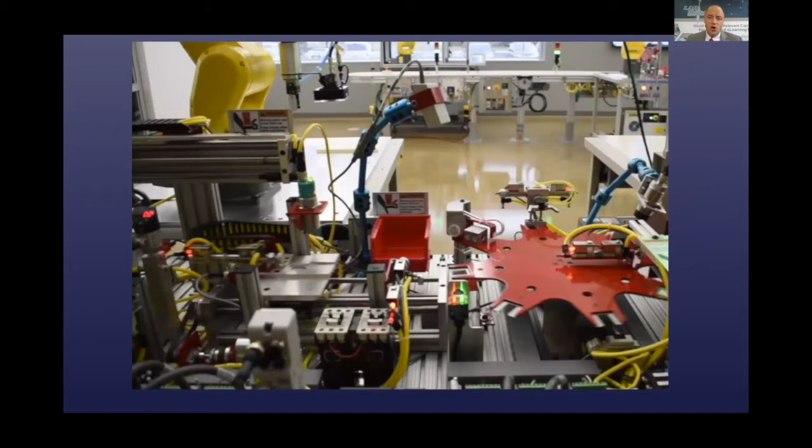We are going to start by talking about mechatronics and then about entrepreneurship. As many of you know, we work with mechatronics programs all over the Midwest, implementing really cool cutting edge technology. Smart devices and smart sensors are a key part of that technology, and when we talk about smart sensors and smart devices, one of my favorite types is radio frequency identification.

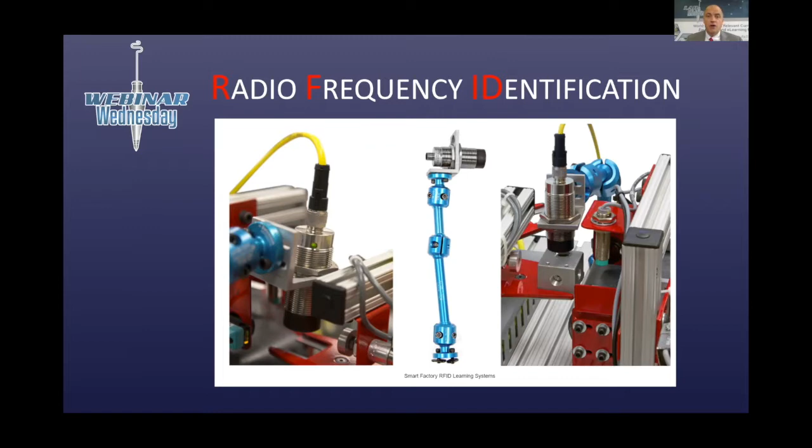This isn't a coincidence. I actually started my career in manufacturing in the world of RFID. If any of you have had a loved one in an Alzheimer's care center or assisted living center who was prone to wandering, they put a little RFID tag on your loved one to prevent them from wandering out of a door or onto an elevator. If you've been involved with a birthing center, where they put an RFID tag on the baby to prevent abduction from the hospital, that was our product. We pioneered that market nearly a quarter century ago.

It was absolutely fascinating to be part of a fast growth, high-tech company early in my career. Some folks even called us entrepreneurs. I don't know that we were entrepreneurs necessarily.

When I was in business school, I was actually approached by the dean of the college and invited to enroll in a course on entrepreneurship, and I didn't do it. Part of the reason was I wasn't even sure entrepreneurship was something you could learn, as opposed to being personality traits and things that were just innate in individuals.

But when we think about entrepreneurship, I think there are four things that make somebody entrepreneurial. Number one, an entrepreneur listens. When we were developing products for the healthcare industry, we did not start by going to our engineering team and saying, what do you think the market would like? Where did we start? Of course, we started by going to our customers.

We went to the market and said, what would make your life better? What could we innovate that would improve your ability to do your job? So we start with listening, listening to the market and listening to what it is telling us.

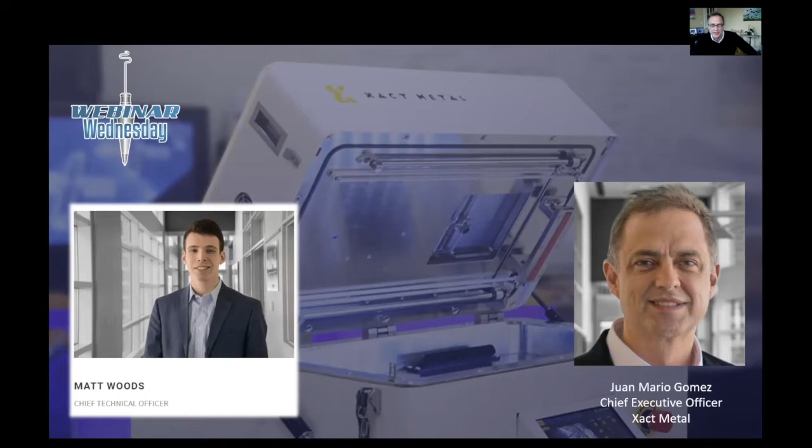It's the area that is one of the key areas in the manufacturing world today. It's one of the key areas where engineers need to be trained in the future. And if the market is there and if we can bring lower cost printers to the marketplace, which is what is really restricting the market from being successful and well adopted, maybe we have something here. So that's how we met. We embarked on a journey together about 3+ years, almost 4 years ago. And it's been a very fun ride.

And I know from visiting, it's just an incredible culture of entrepreneurialism at Xact Metal there in State College. And I got that sense both from you and from Matt. Tell us about what you love about leading an emerging entrepreneurial company.

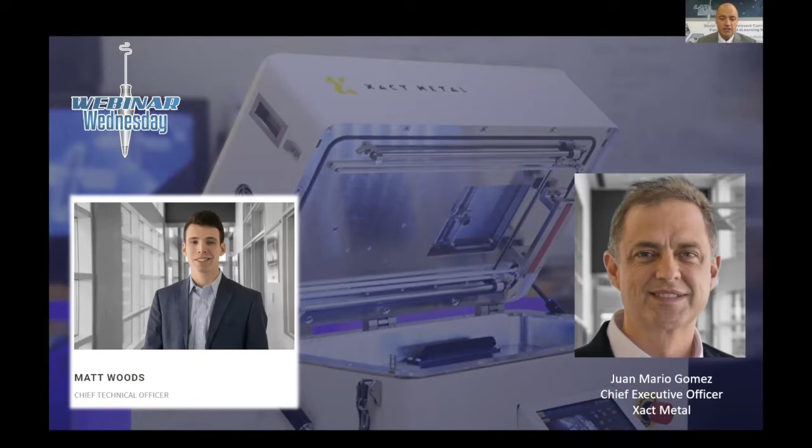It's just great. I mean, the idea that we're in State College, Pennsylvania, it's fun. It's a small university town, but it's also next to Penn State, so there's lots of talent and capabilities near us. But more importantly, just like the 3D printing business is, also our companies like that. You have people like Dave and myself that have scars to experience in life and have done many crazy things. But there's also young people like Matt that you see in the picture here, who are just fearless. They have great ideas, great motivation. They really love the technology and what they're doing. And they just need some guidance and direction, and then they're changing the world.

That type of culture we want to keep here within Xact Metal is one that we're young and energetic, but we also are behind our customers, behind what we're doing. We deliver a good product that's ready to go from the beginning, that we support it well. And that kind of dichotomy is what makes us strong, I think, and it's fun. For me, it's really enjoyable to come to the office and now online and see people and the type of ideas that we bring together.

And that spirit of innovation is alive and well, being so close to an iconic college campus. Having visited, you toured me through not just your facility, but we spent some time on campus, some time in Innovation Park. There's a different spirit in that part of the world. What can you tell us about how being located in Innovation Park affects the culture of Xact Metal?

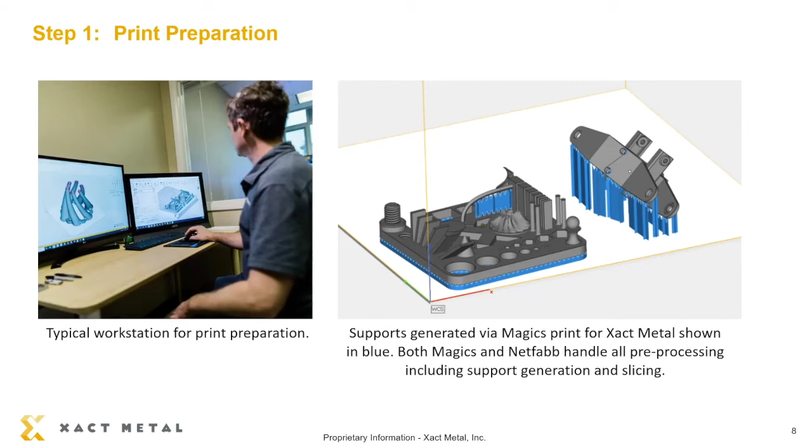Before I hand it off to Stevie, let me quickly walk through with a series of slides what you're going to be seeing. The first step is preparation of the build file, essentially taking a supplied CAD file and running it through software to optimize the position and orientation of the part on the build plate.

The second step is loading powder into the printer. The printer operates using a high-powered laser to outline the shape of the part. It fuses the powder, and when the powder solidifies, it assumes the final shape of the component.

As you can see, Stevie is wearing personal protective gear that is required when the lid of the printer is open and you're adding powder. Once the lid is closed, the PPE is no longer required until you reopen it to remove the part.

During the virtual demonstration, to make it easy to understand, we will not actually be using real live powder, so Stevie will not be using the PPE.

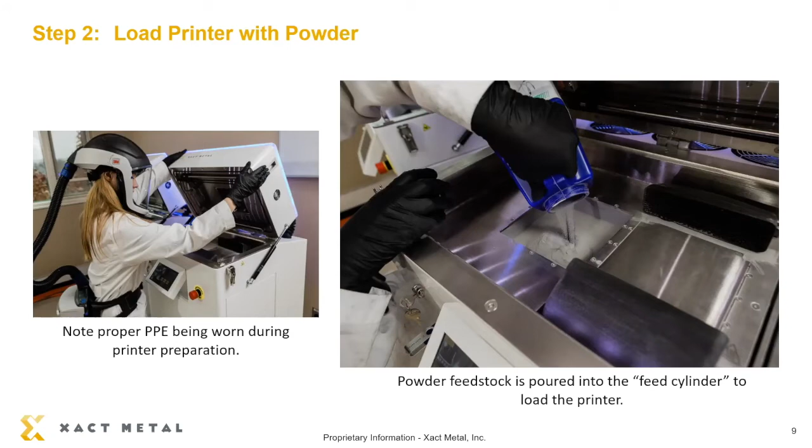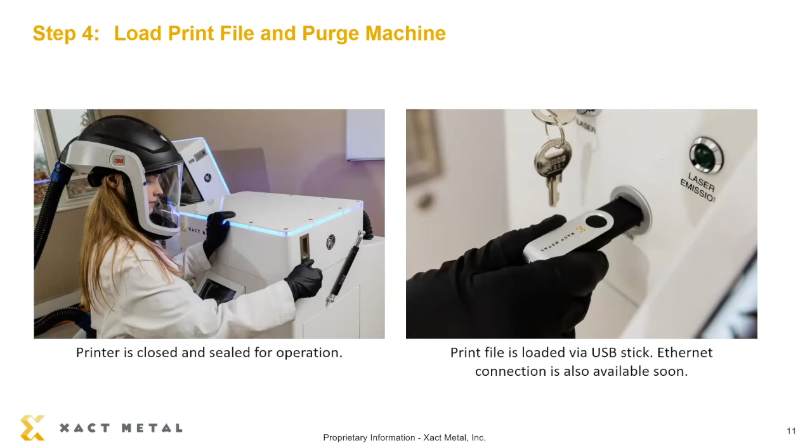After loading the printer with powder, there are a couple other steps to prepare it for printing. We close the lid and purge the machine with an inert gas such as nitrogen or argon. Stevie uploads the build file via USB or through an Ethernet connection. We level the build plate, and then the print is actually conducted.

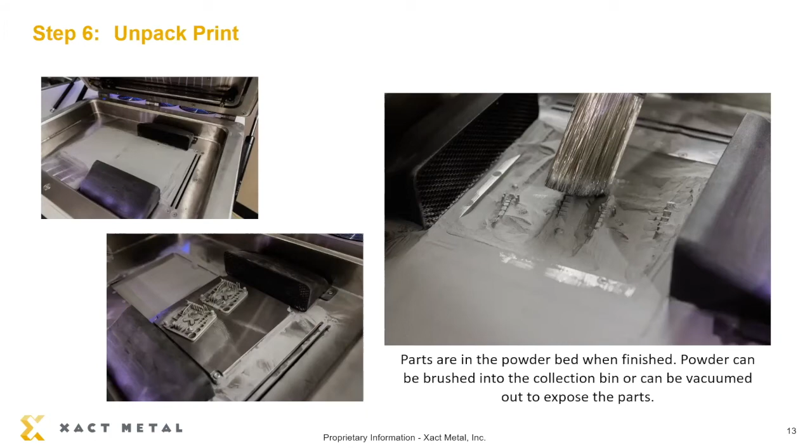After the print is done, we unpack it. On the bottom left you can see the parts, and on the right the powder is being removed. After the build plate is removed, we have to cut off the part from the build plate.

Metal powder bed fusion printing is a micro welding process, so the part is actually welded to the build plate. You can use an EDM, a precision bandsaw, or even a flush cutting tool to remove the part.

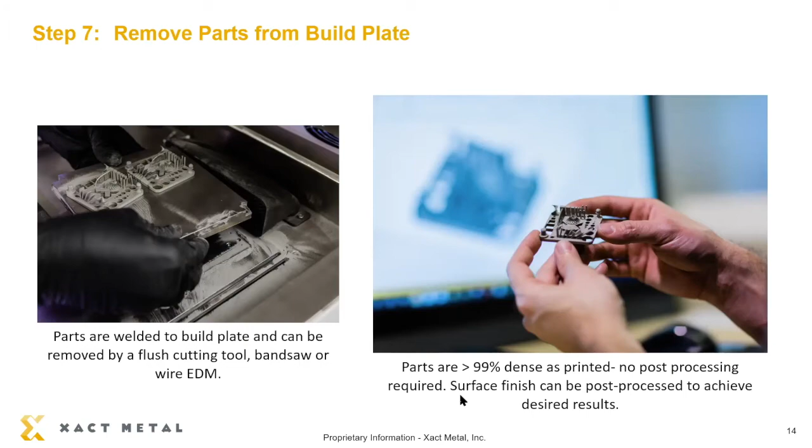So at this point, I'm going to turn it over to Stevie. As I mentioned, Stevie's been with us for about two years. She is very passionate about 3D printing, so I'm going to turn it over to her.

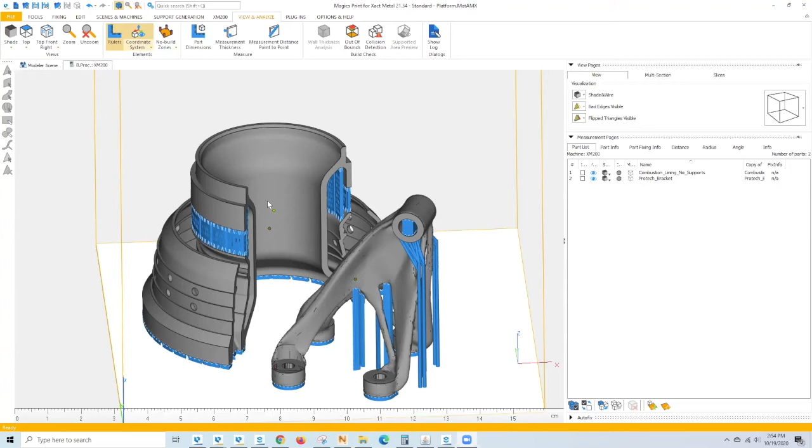Let me go ahead and share my screen. Like Dave said, the first step in creating a print for the XM200C is loading a file into our software. We have partnerships with both Materialise Magics and Autodesk Netfabb. Here I have Magics open.

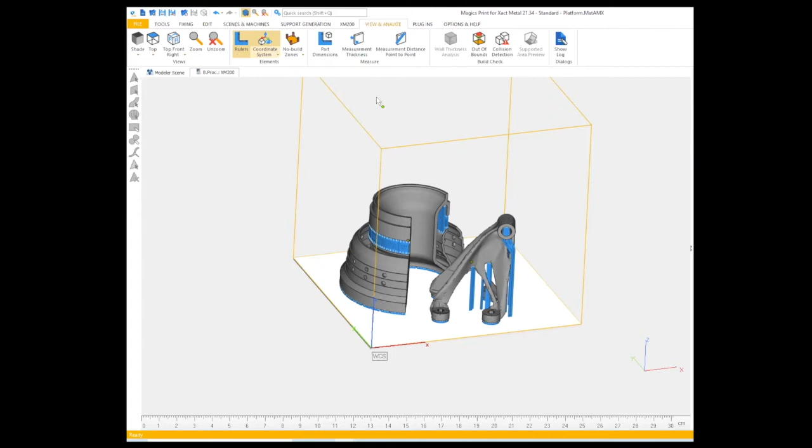We have a scene created for our printer, illustrated up here, the XM200. When you have a scene, it opens up a build area that is representational of our build chamber in the printer. Here we're able to import STL files using the import part command. This blue mass is a support material that is applied to the part as well.

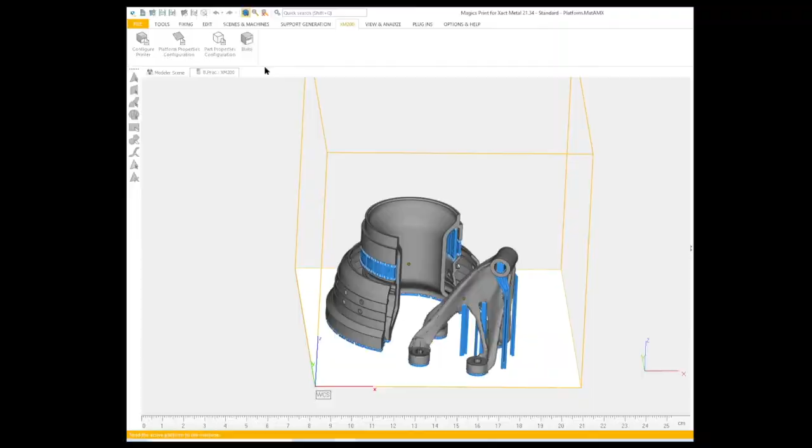When your parts are all done getting set up, we can export the part. Up here on the XM200 tab, we can select build, rename the file, and submit it for a quick export. You can see a notification has popped up that our print is now being sliced.

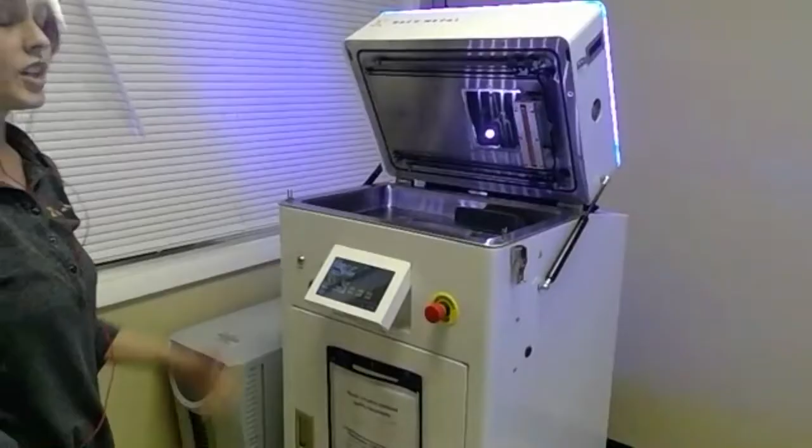This is our XM200C. As you can see right inside, everything is very simple and easy to see. We've got our feed cylinder—this is the chamber where the powder will go—and our build cylinder, which is the chamber where the print will occur.

Between each layer, the feed cylinder will raise and the build cylinder will descend, and our recoater will travel back and forth between the print area to add more powder from the feed cylinder onto the build cylinder.

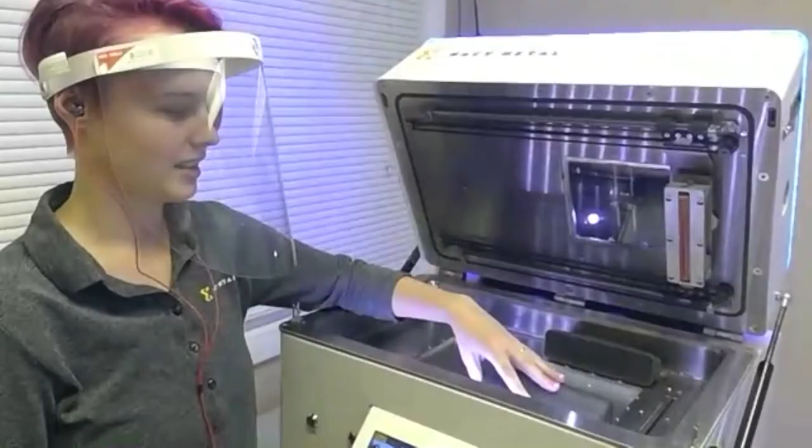We also have two manifolds. This is our high pressure manifold, and this is our low pressure manifold. The high pressure manifold has two bolts that keep it bolted down, and the low pressure manifold lifts out for easy cleaning.

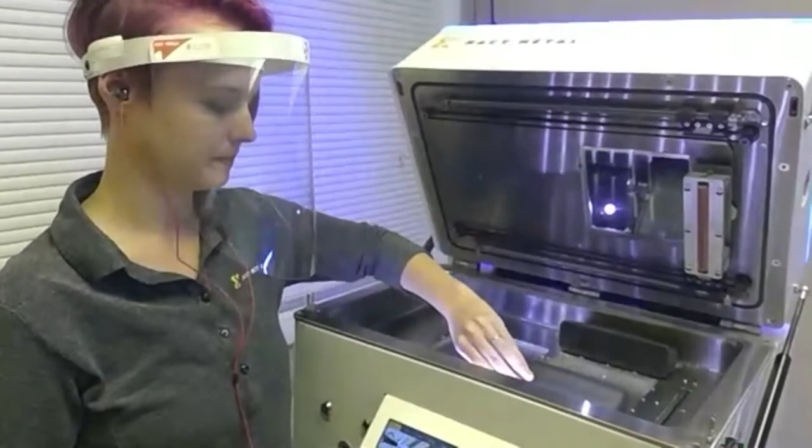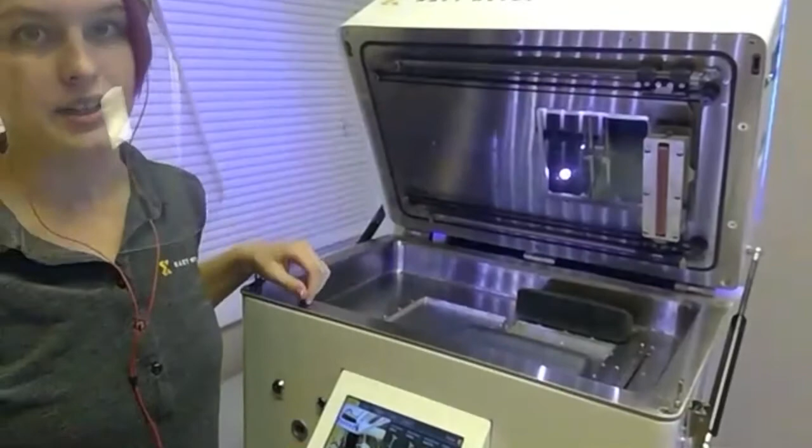Over here is our catch bin. As excess powder is being brought across the build area, it'll fall into a funnel. This will then end up in a catch bin that can all be resieved and returned to the printer for the next print. This is our optical window.

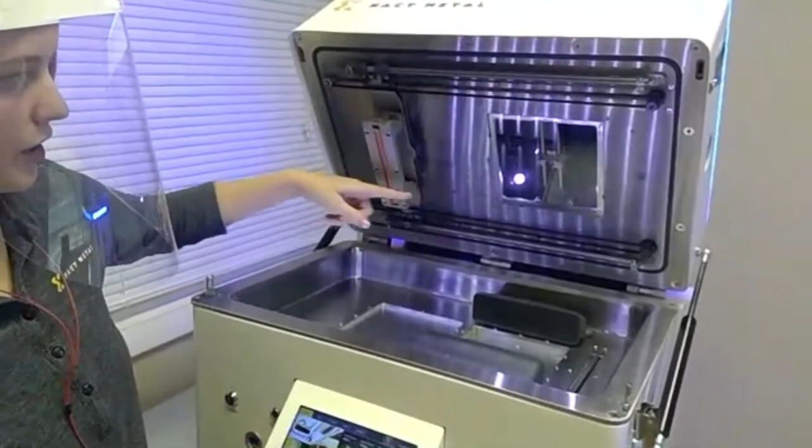As you can see, back here is where the scanner is. The laser comes in and gets reflected off a few sets of mirrors on an X and Y gantry. These move 500 millimeters per second to expose the layer over the print.

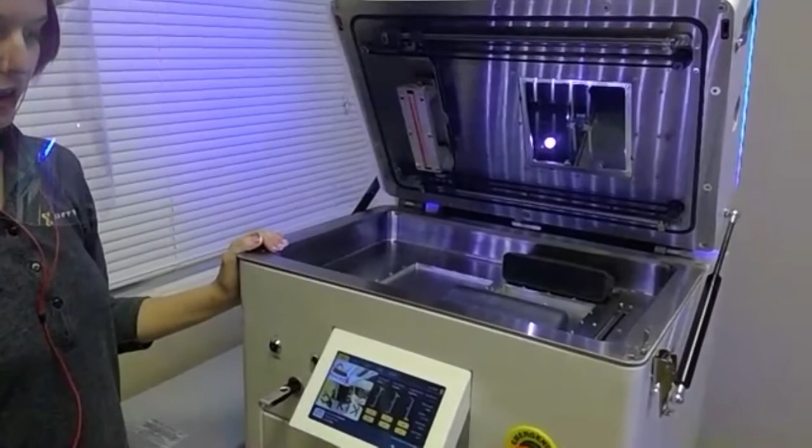Here we have the thumb drive with our print that we exported. To upload it, we simply put the USB inside the printer, and a notification screen will pop up. Using this, we can upload our build—here it is, test parts. You can even upload prints while the printer is already running.

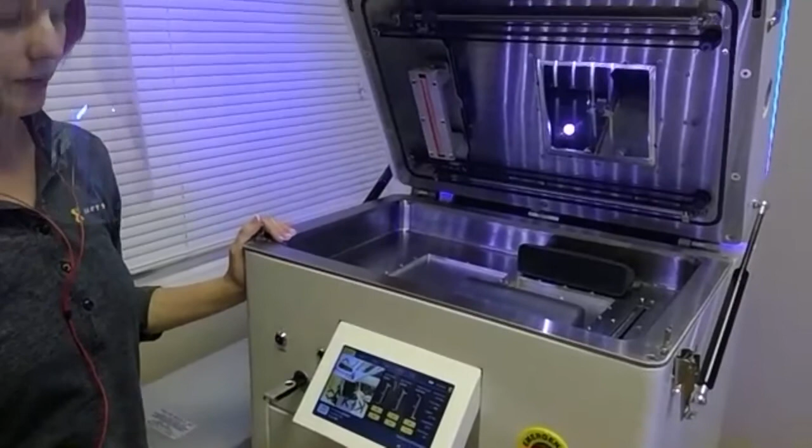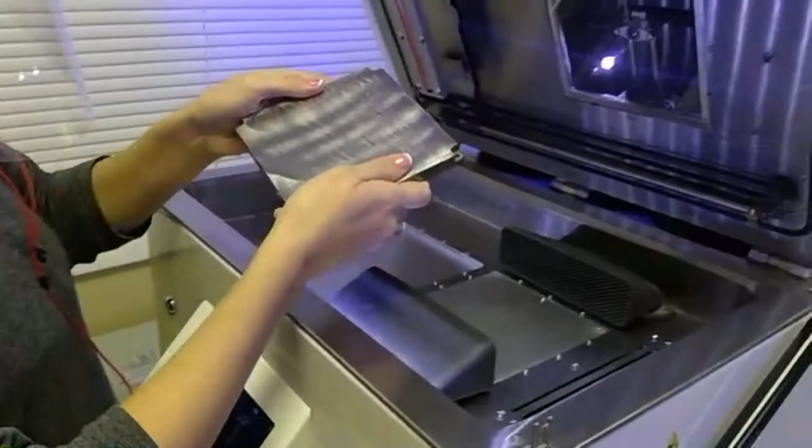For this next portion, to simulate starting a print, we can add a build plate. Let me grab one—here's a build plate. These are made of A2 tool steel, and we reuse them between prints. We simply drop it in and use a 3 millimeter hex key and four screws to bolt it down.

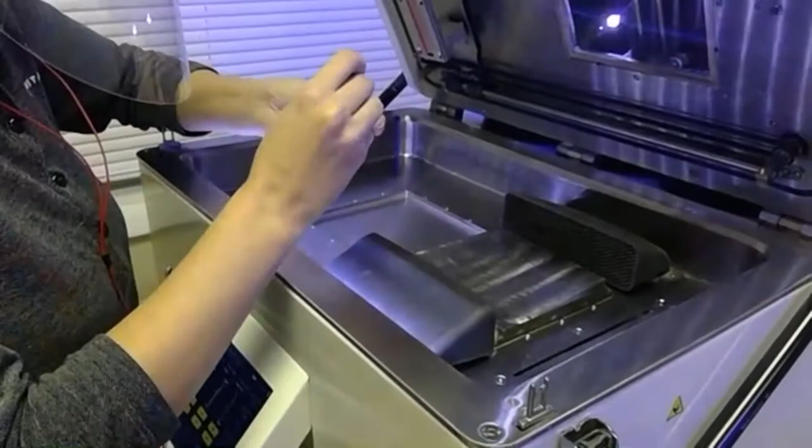Great, so now we have our build plate installed. Before starting a print, we would descend the build plate so that it is flush with the lid of the chamber. This gives the recoater clearance to move and start the print.

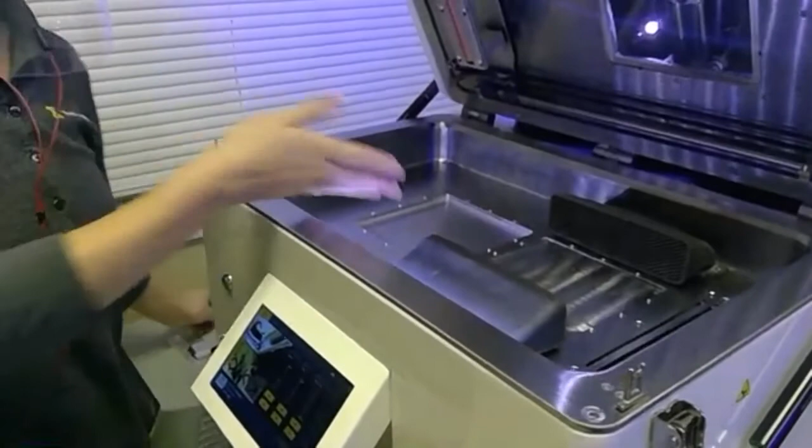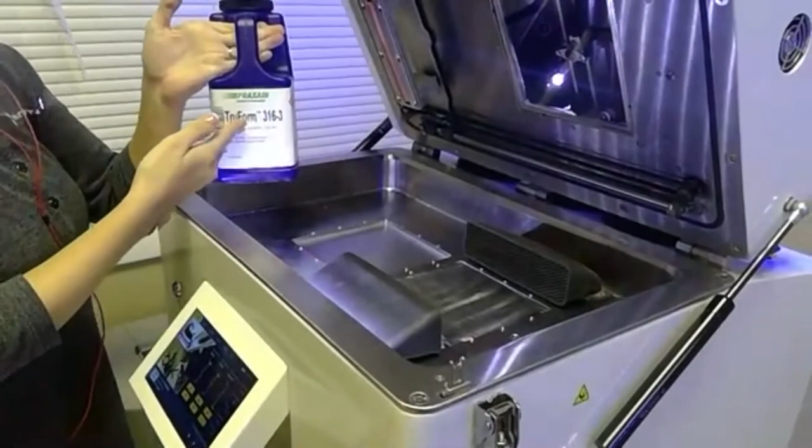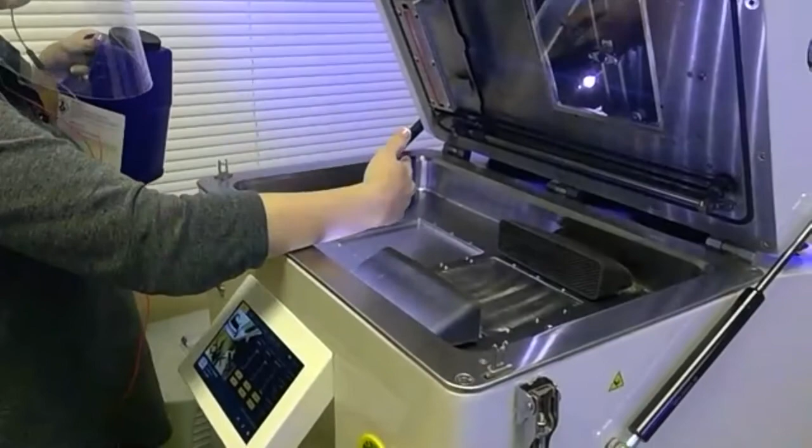Now we can add our powder. Like Dave mentioned, we won't be using live powder, but our powder arrives in these bottles from Praxair. We simply unscrew the top of the lid and pour the powder directly into the printer. After it's loaded, we use a scraper to wedge the powder to expose any dormant oxygen pockets.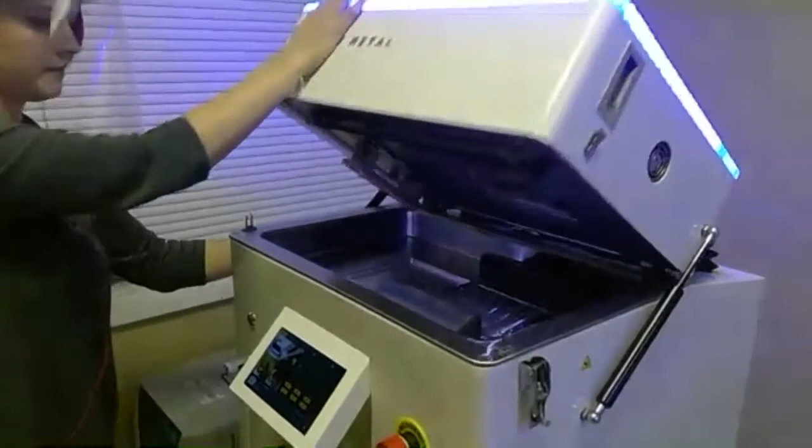To start the printer, all we need to do is close the lid, engage the latches on either side, and then we can begin the auto purge.

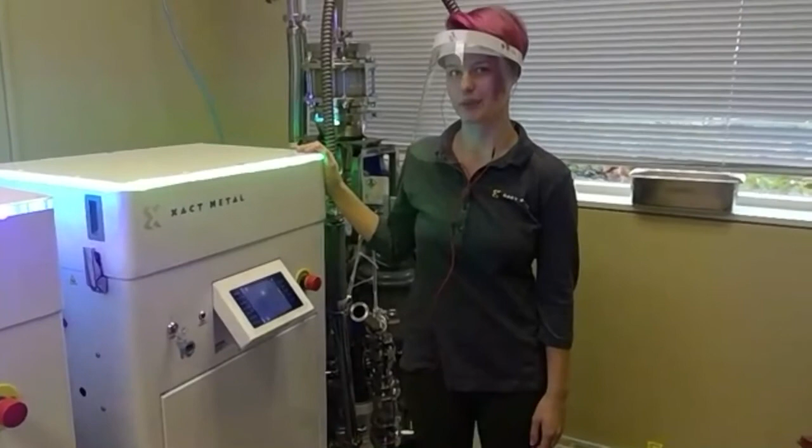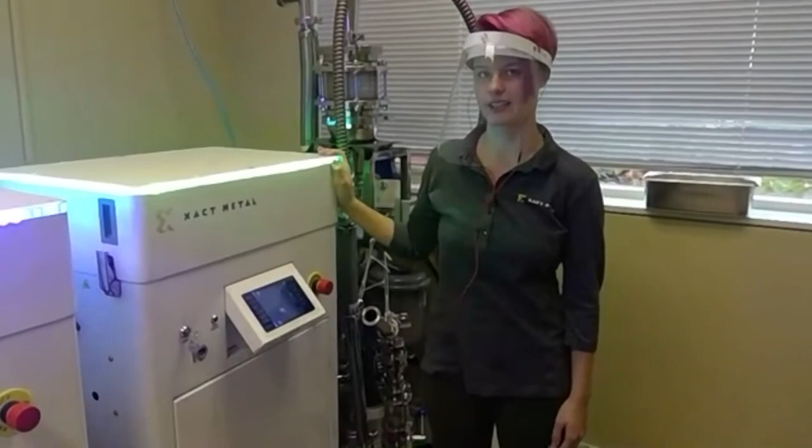As you can see on this printer that's running, we have a green light, because these LEDs are status indicating. The blue light on the previous printer indicated that it was in an idle state, whereas green indicates that the printer is running and in a printing state.

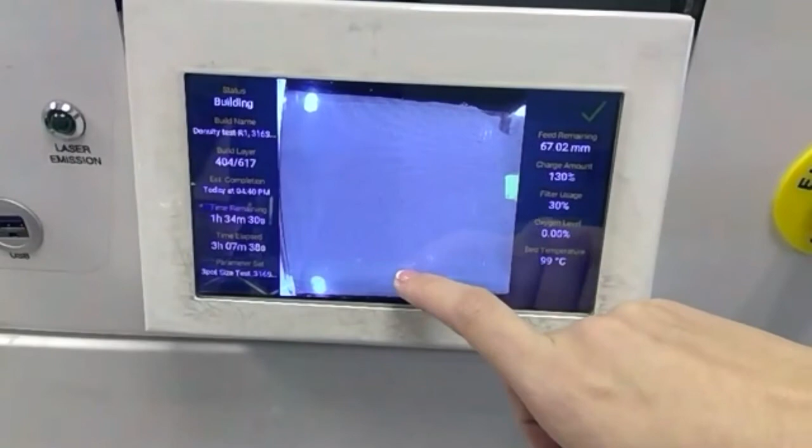Here on the front you can see that the printer is actually printing. The display is enlarged, showing that the laser is emitting over the part and the recoater is bringing across more powder between layers. We also have some information on display here at the top.

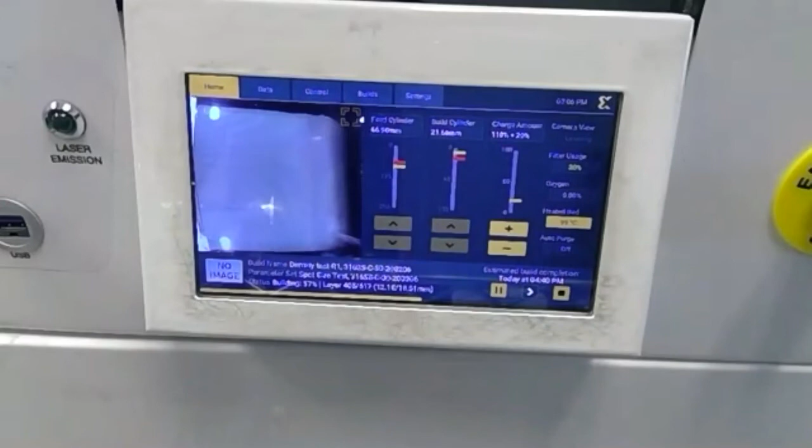Here you can also see that the feed and build cylinder positions are locked during the print, so no one can come in and change the positions during the print. But you can change the charge amount, which is the ratio of powder that's brought across between layers.

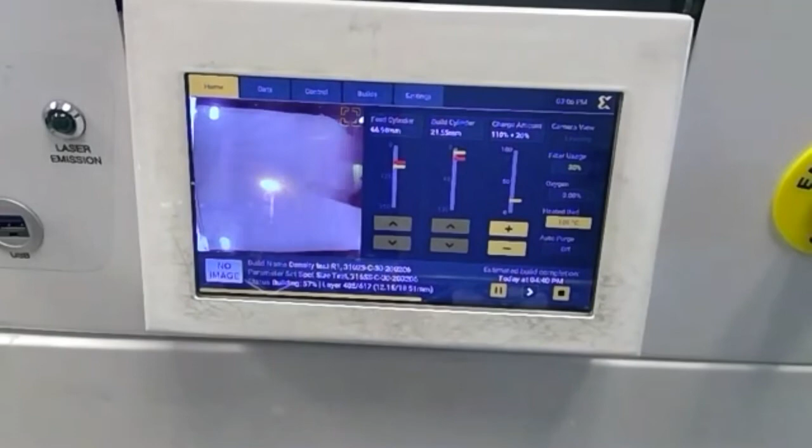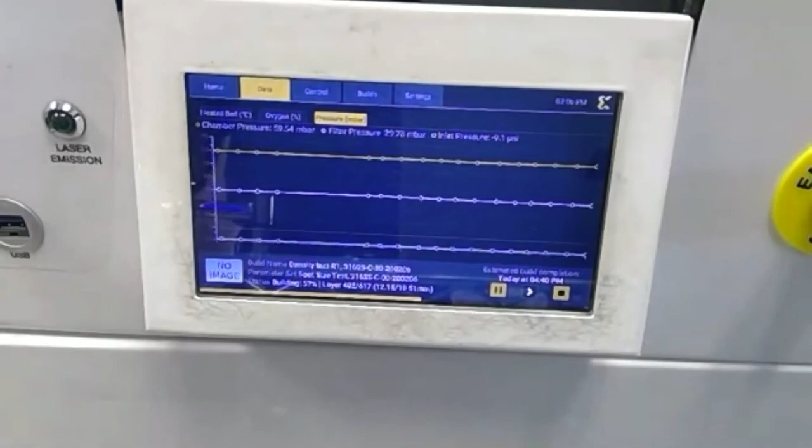Over here we have the data tab. This gives some quick information like the oxygen level and also different pressures inside the printer, which can help to know when the filter needs to be replaced.

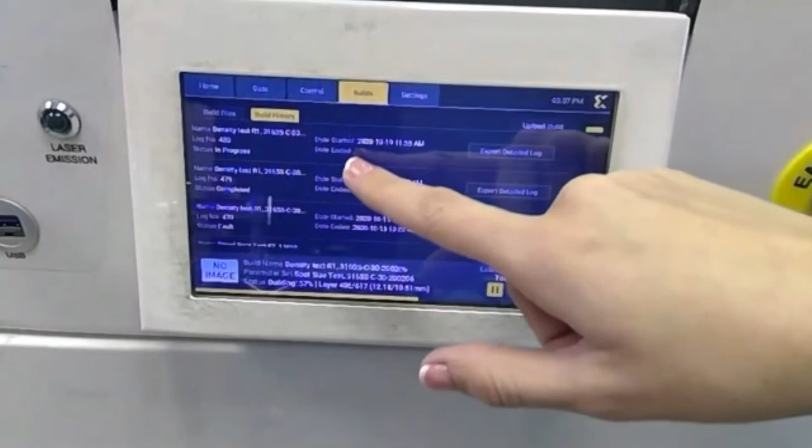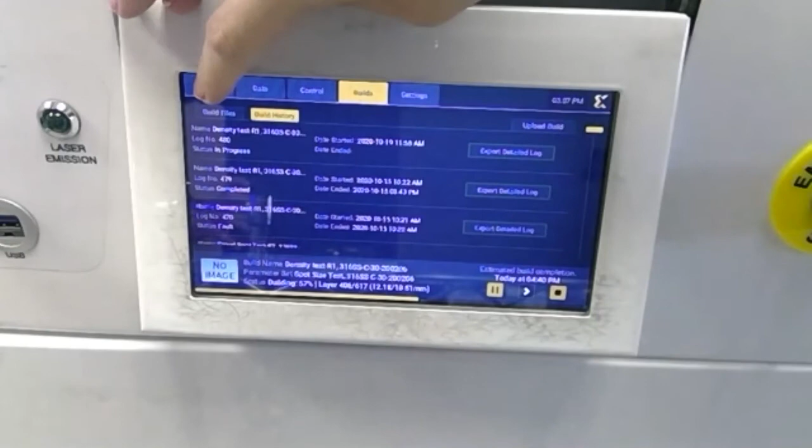One of my favorite features about the printer is the detailed build log. Whenever the printer runs, it actually takes a picture pre and post laser exposure for every layer, and also takes a data sample every second. All of this information is compiled into a zip folder that you can then reference after the print.

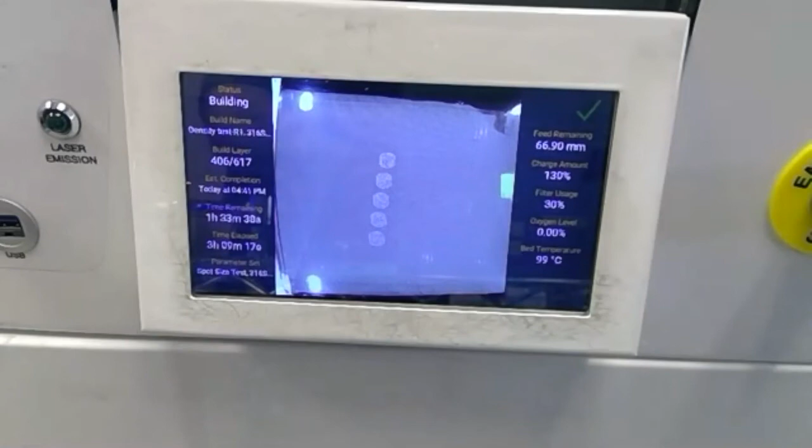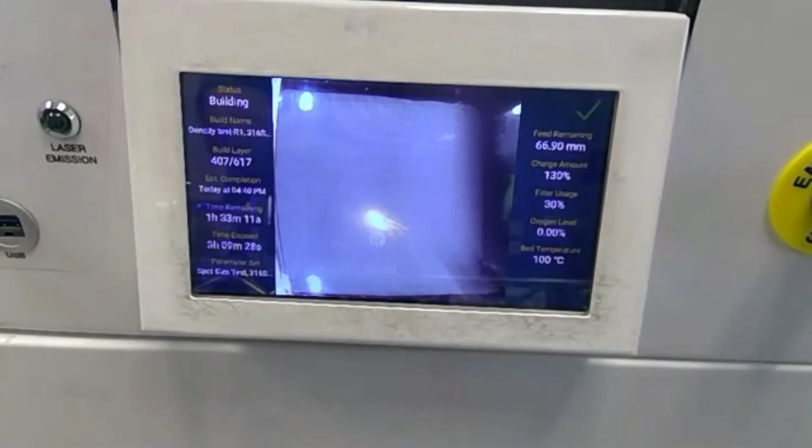So if you come in the morning and the print doesn't look exactly how you thought it would, you can quickly reference the build log and see if something happened during the print, like insufficient supports being used or your argon supply running out. Now we're ready to begin removing a part from the XM200C.

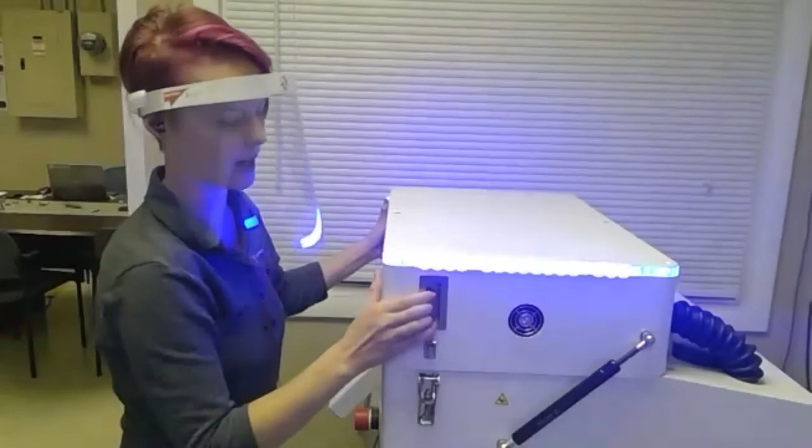First, we'll begin by undoing the latches and lifting the lid of the printer. Typically, we would see powder across the feed and build cylinder.

Our first step would be to take all of the powder in the build cylinder and move it into the catch bin. You can do that by using a brush to manually move it across, or by using a vacuum and cyclone separator to vacuum out all of the powder and put that through a sieve.

All of the powder in the catch bin and build cylinder can be re-sieved and returned to the printer to be reused in the next print. Once all the powder is removed, we can then eject our build and remove it from the printer.

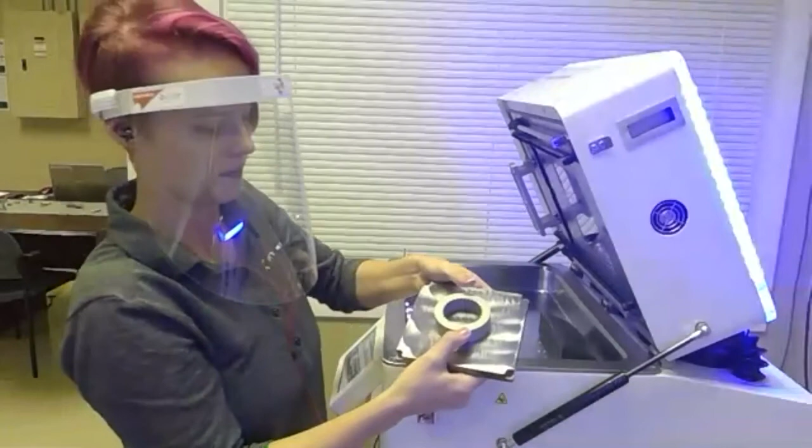So here we have our print. Once the part is removed from the build plate, additional post-processing steps can include removing support material from the part, bead blasting, or even heat treatment.

So with that, that concludes our XM200C virtual demo. We want to give a big thank you to Lab Midwest.